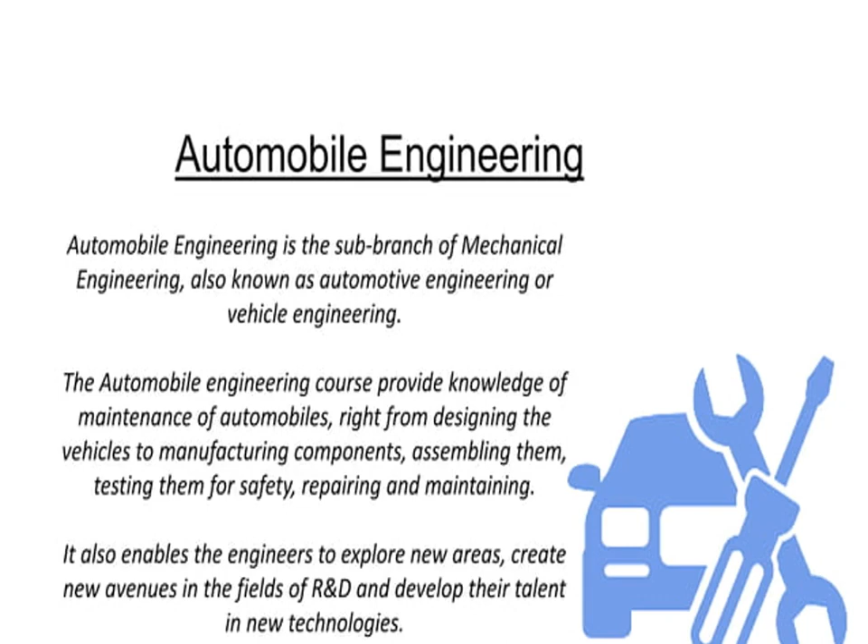So first we'll see what is automobile engineering. Automobile engineering is the sub branch of mechanical engineering, also known as automotive engineering or vehicle engineering. The automobile engineering course provides knowledge of maintenance of automobiles, right from designing the vehicle to manufacturing components, assembling them, testing them for safety, repairing and maintaining. It also enables engineers to explore new areas and create new avenues in the field of R&D and develop their talent in new technologies.

So it is having a brief vast history. We'll discuss one by one.

The first automobile, powered by an IC engine, was invented and designed in Germany during the 1880s. Henry Ford founded the Ford Motor Company and started an era of US leadership in auto production. Ford introduced the Model T, which by 1913 was being manufactured through assembly line techniques. By 1920, General Motors had become the world's largest auto manufacturer.

In 1897, the first car ran on Indian roads, and Hindustan Motors was launched in 1942. Mahindra and Mahindra was established by two brothers in 1945.

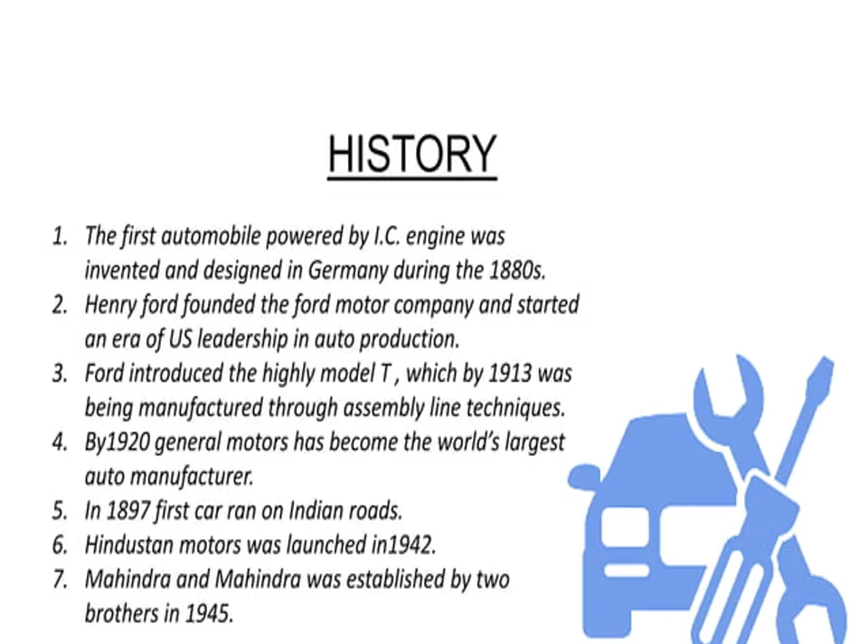Now we'll see the classification of automobiles. Automobiles or vehicles can be classified on different bases as given below. One is on the basis of load - heavy transport vehicles like trucks, buses, etc. Light transport vehicles like pickup, wagon, etc. Light motor vehicles like car and jeep, etc.

On the basis of wheels: two-wheeler vehicles, for example scooter, motorcycle, scooty, etc. Three-wheeler vehicles, for example auto rickshaw, three-wheeler scooter, and tempo, etc. Four-wheeler vehicles, for example car, jeep, trucks, buses, etc. Six-wheeler vehicles, for example big trucks with two rear axles, each having four wheels.

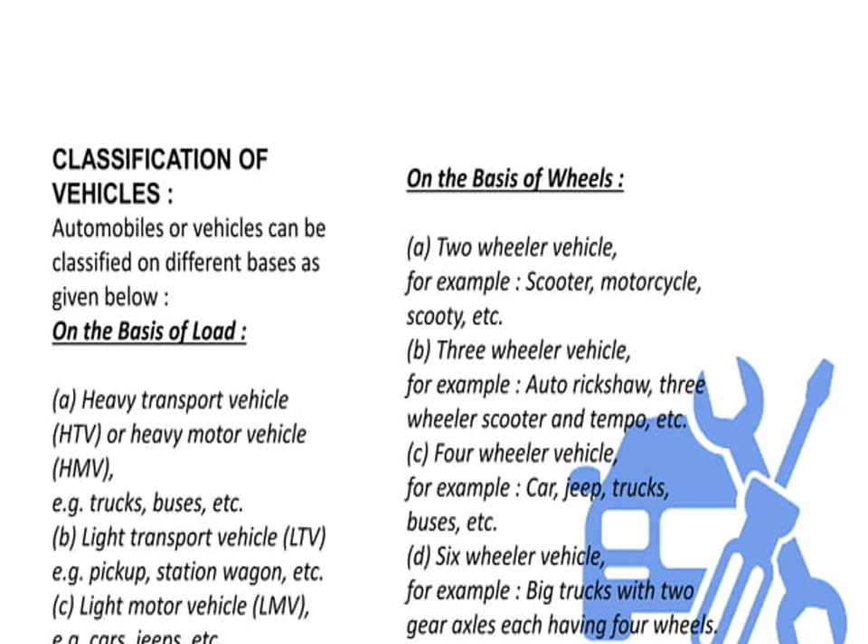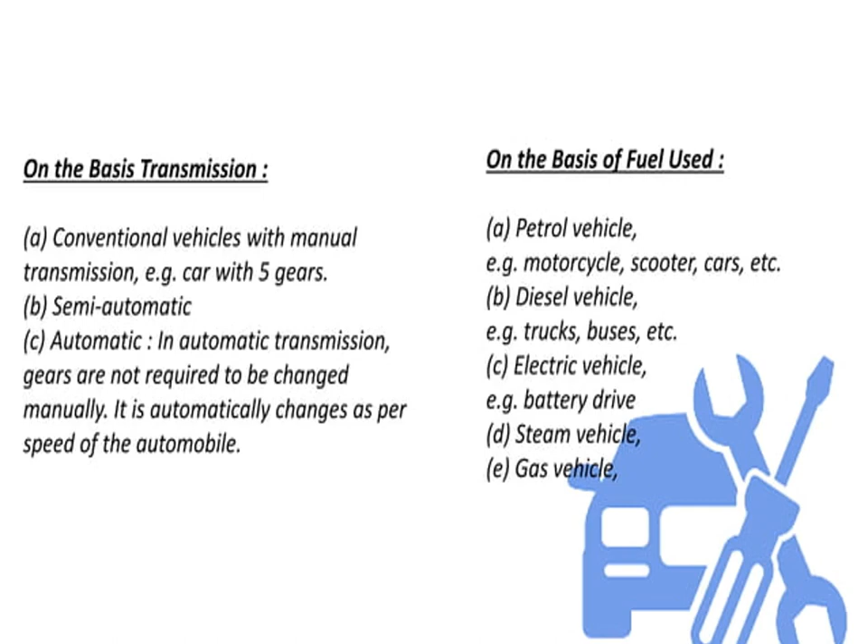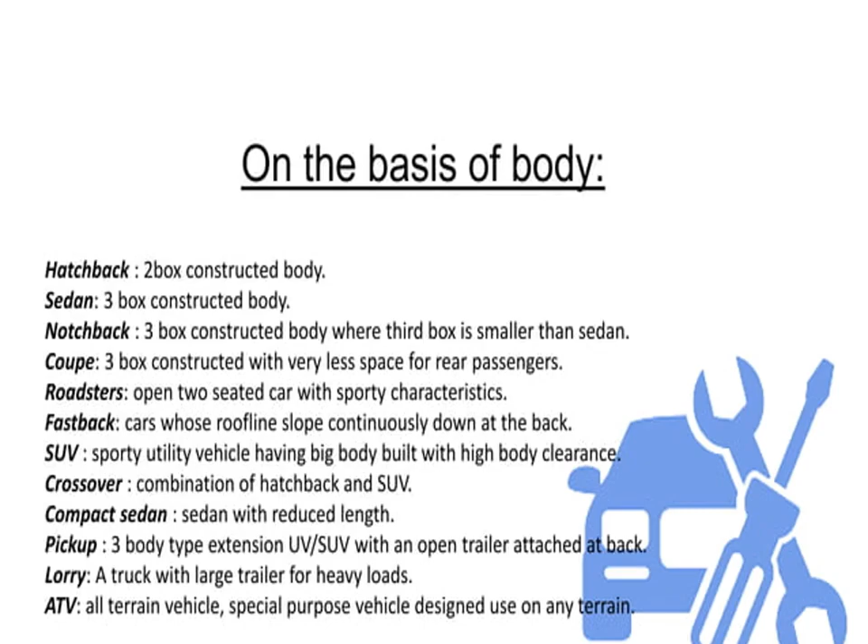On the basis of transmission, and also on the basis of fuel used, like petrol vehicle, diesel vehicle, electric vehicle, steam vehicle, gas vehicle. And on the basis of body: hatchback, sedan, roadster, fastback, SUV, crossover, compact sedan, pickup, lorry, ATV. Now we'll see the components of automobile.

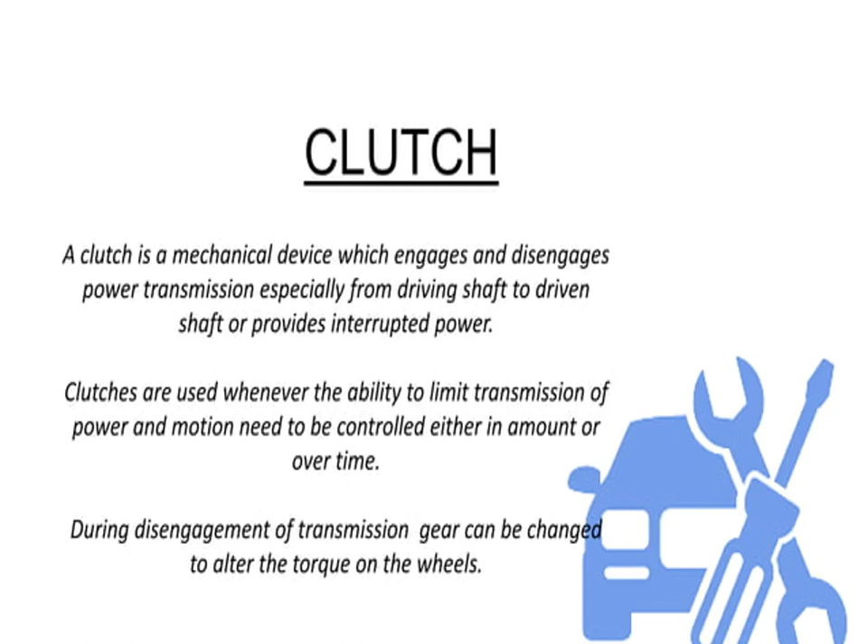The first component is the clutch. It is a mechanical device which engages and disengages power transmission, especially from the driving shaft to the driven shaft, or provides interrupted power. Clutches are used whenever the ability to limit transmission of power and motion needs to be controlled, either in amount or over time. During disengagement of transmission, gears can be changed to alter the torque on the wheel.

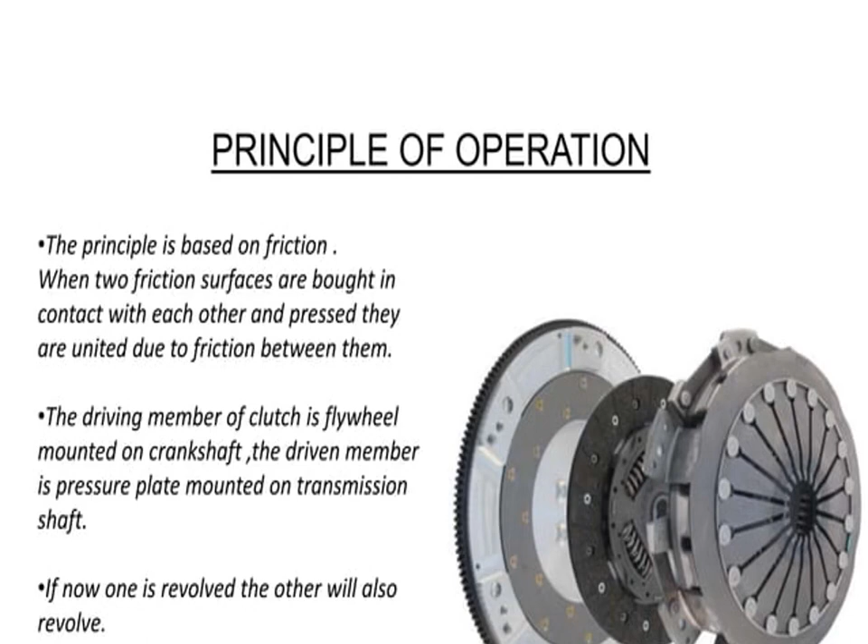We'll also see the principle of operation of the clutch. The principle is based on friction. When two surfaces are brought in contact with each other and pressed, they are united due to friction between them. The driving member of the clutch is the flywheel mounted on the crankshaft. The driven member is the pressure plate mounted on the transmission shaft. When one revolves, the other will also revolve. Friction materials like millboard type, molded type, and woven type friction material are used.

We'll also see one of the components in automobiles, that is gear. A gear or a cogwheel is a rotating machine part having cut teeth or cogs which mesh with another toothed part to transmit torque.

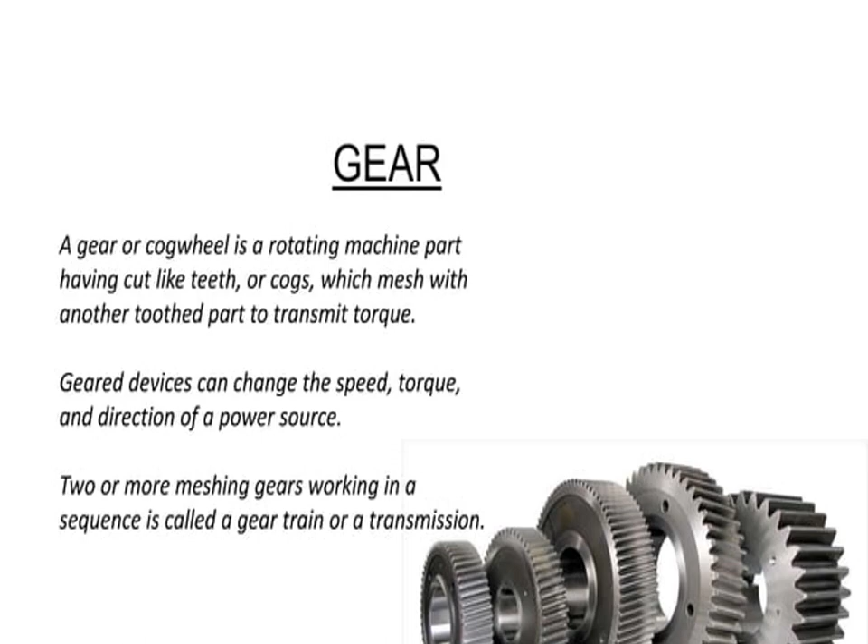Gearbox: the mechanism that transmits engine power to the rear wheel or to the front wheel is also known as the transmission system. The gearbox consists of various gears of different gear ratios. A gearbox changes the engine speed into torque when climbing hills and as the vehicle requires. Sometimes it is known as a torque converter.

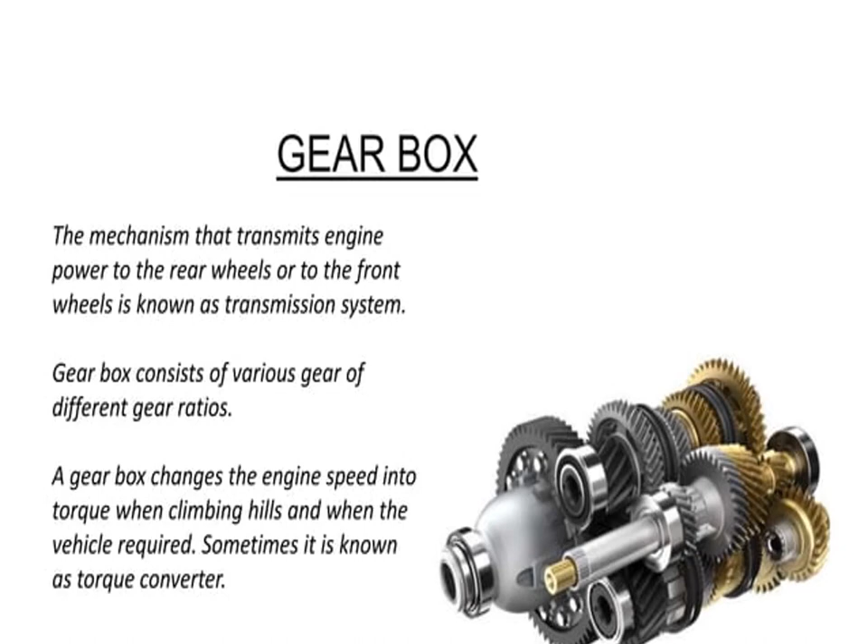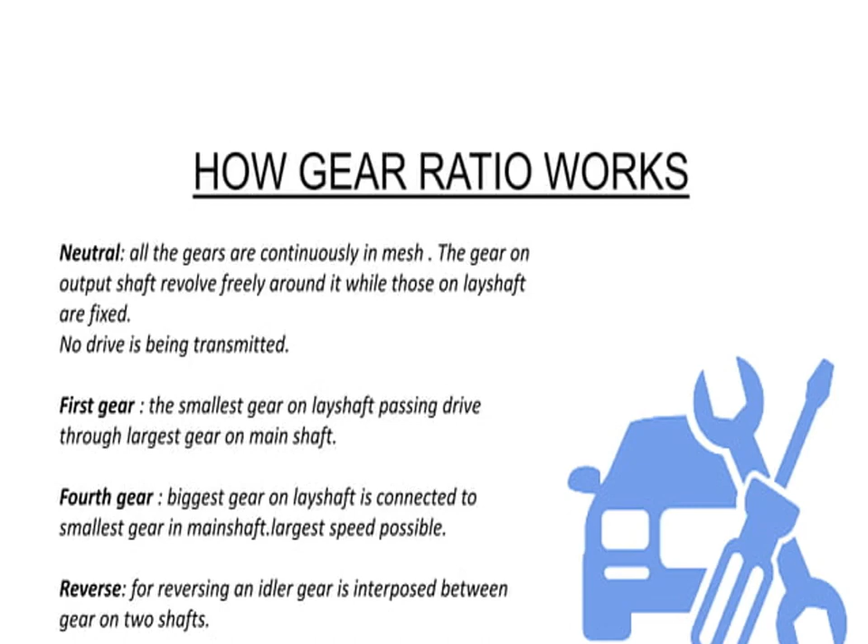How does gear ratio work? It works in different stages: first we put it in neutral, then first gear, second, third, fourth gear, and also reverse. Reverse is used for reversing. An idler gear is interposed between gears on two shafts.

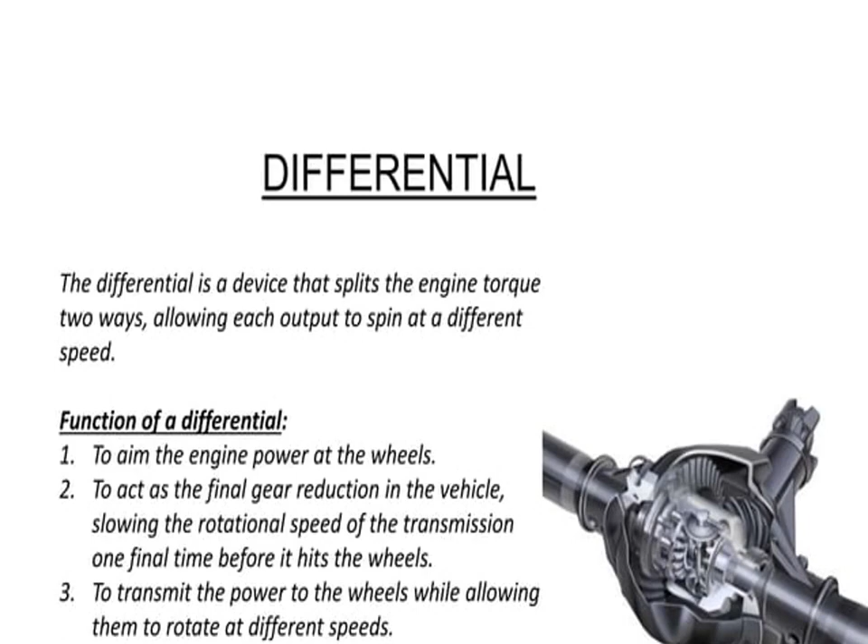Now we'll see the differential. The differential is a device that splits the engine torque two ways, allowing each output to spin at different speeds. The function of the differential: first, to aim the engine power at the wheel, also to act as a final gear reduction at the wheel, and also to transmit power to the wheels while allowing them to rotate at different speeds. The working of the differential is also given.

Now we'll see the steering system. What is the steering system and what does it do? The front wheels can be turned left and right by a steering system. The steering wheel is placed in front of the driver. Its primary function is to control or provide angular motion to the wheel. Nowadays, many vehicles are equipped with power steering, which uses pressurized fluid to reduce steering effort.

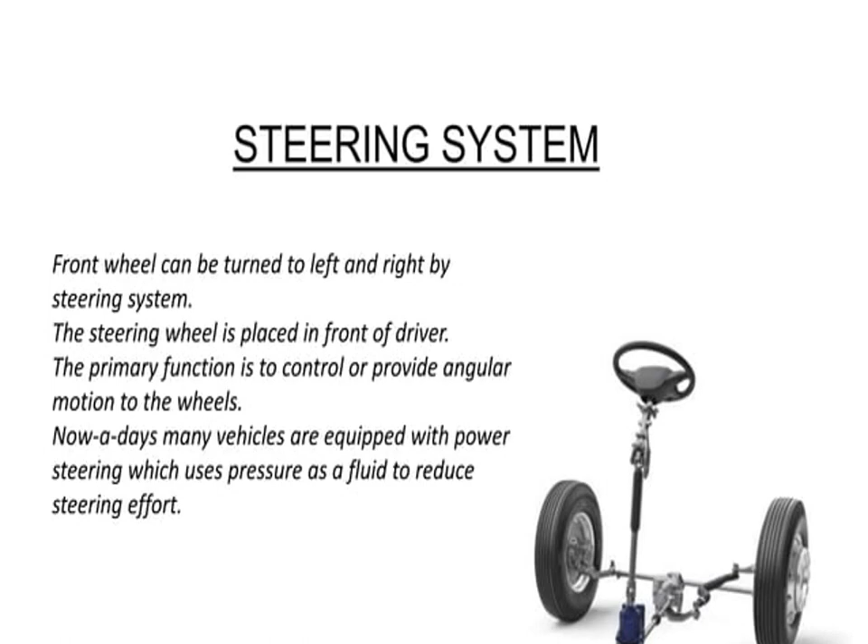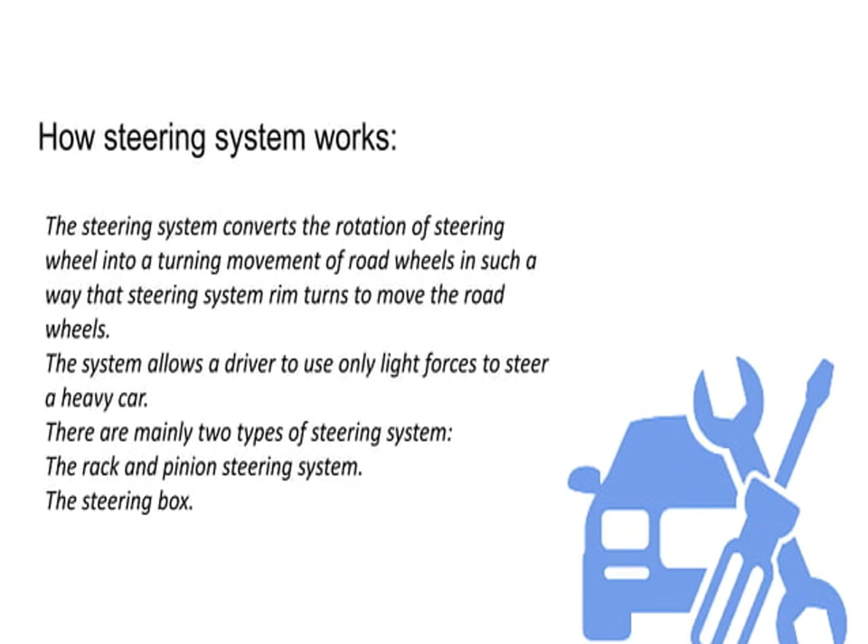So how does the steering system work? The steering system converts the rotation of a steering wheel into a turning movement of the road wheels, in such a way that as the steering wheel rim turns, it moves the road wheels. The rack and pinion system, the steering box system, and the power assist system are used.

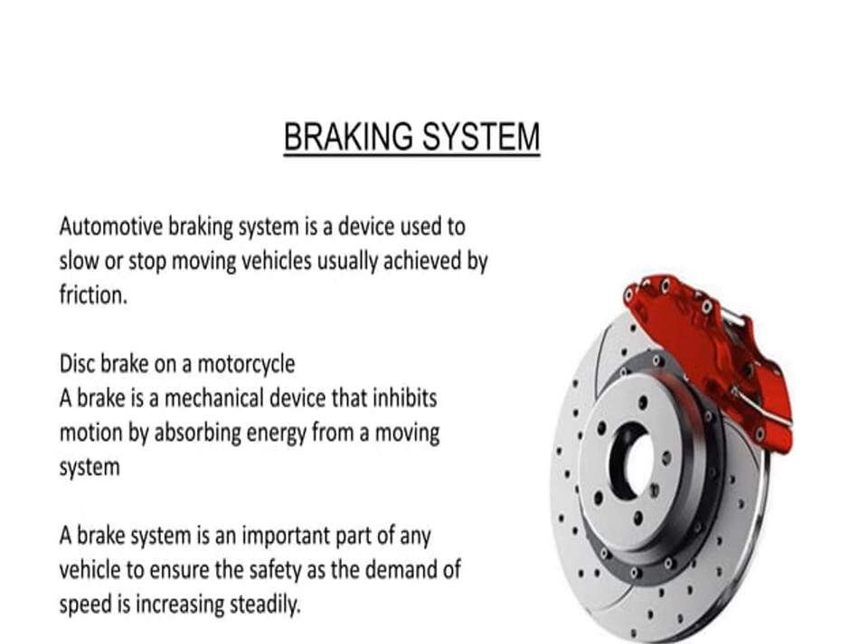Now we'll see the braking system. An automotive braking system is a device used to slow or stop a moving vehicle, usually achieved by friction - for example, the disc brake on a motorcycle. A brake is a mechanical device that inhibits motion by absorbing energy from a moving system. In modern cars, brakes are on all four wheels, operated by a hydraulic system. The brake may be disc type or drum type.

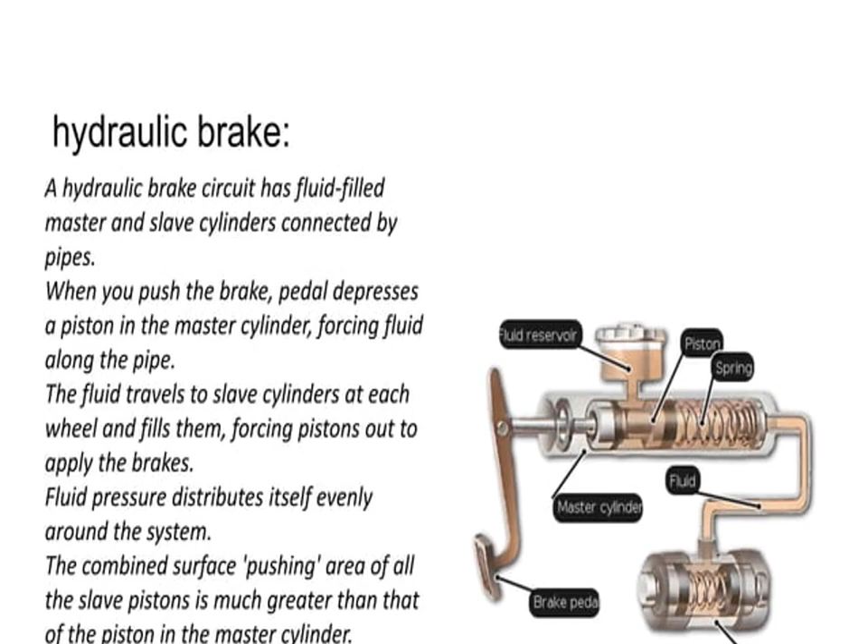Hydraulic brake: the hydraulic brake circuit has fluid-filled master and slave cylinders connected by pipes. When you push the brake pedal, it depresses a piston in the master cylinder, forcing fluid along the pipe. The fluid travels to the slave cylinder at each wheel and fills them, forcing the piston out to apply the brakes. Fluid pressure distributes itself evenly around the system. The combined surface pushing area of all the slave pistons is much greater than that of the piston in the master cylinder. Disc brake, drum brake, and anti-lock braking systems are also used.